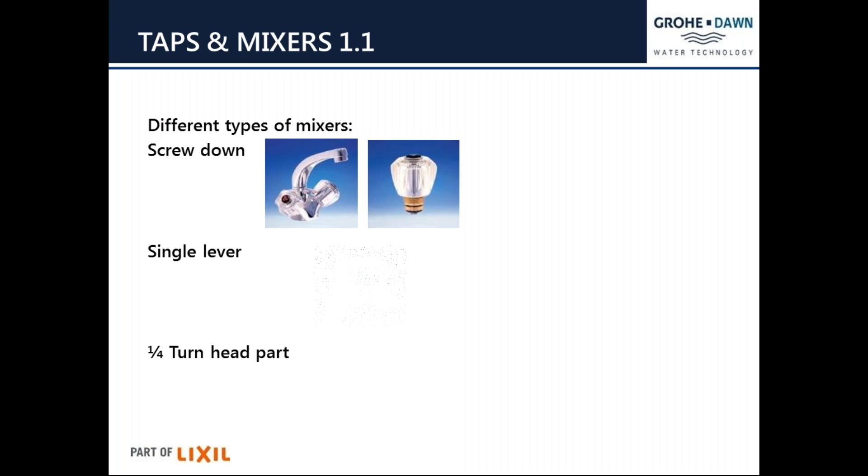Okay, I'm going to continue with the presentation. Just want to get a little bit of a highlighter here. There we go. Okay, Taps & Mixers 1.1 can basically be classified in three specific classifications in terms of how they function.

This is basically across the brands Grohe, Visca and Cobra. You get the screw down versions, the very top images you see there, characterized by head parts and a handle, or head parts and handles. Then the next one, single lever mixers, characterized by a single lever being the actuator operating modus. On the inside of the body you have a cartridge, a ceramic disc cartridge. And then you have your quarter turn head part or quarter turn variety, which is predominantly used in your medical mixers or elbow action mixers.

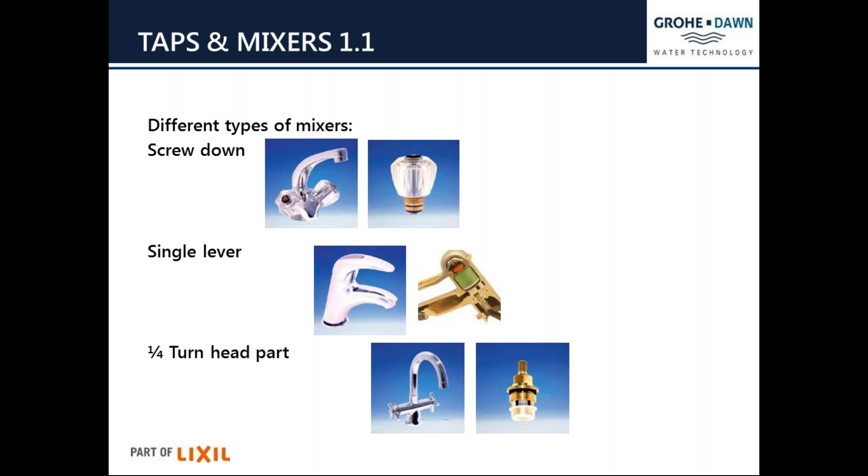Now for decent explanations in terms of what exactly is a screw down. A screw down mixer or screw down tap is characterized by a single operating control or a dual operating control, handles in terms of the screw down mixers. The user has to physically turn these handles in a similar fashion as you would screw in or screw out a screw in a piece of wood, in order to fully open or fully close the actual tap or mixer.

The sealing surface of the head part is made up of a tap jumper and the tap washer. I'm just going to encircle it for you guys so you can see, it's on the very right hand image. Okay done - on the piece I've encircled, that is your jumper with the encapsulated tap washer, and at the bottom you'll see a small piece sticking out. That's just a retaining nut to prevent the washer from falling out.

The distinction between a normal hardware half-inch or three-quarter inch tap washer and the Cobra variety is that the Cobra variety is made of a compound of rubber that does not form a nutrient source for bacteria.

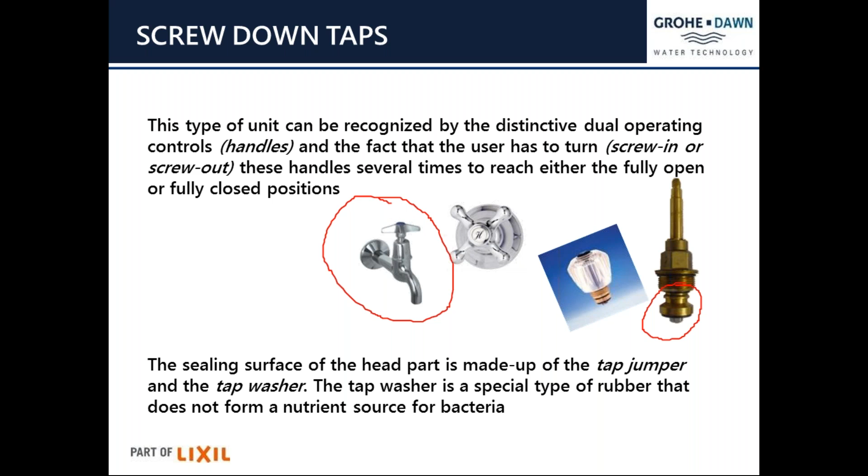If you have a look at the products on the slide, the very one on the left is a bib tap. Your pillar tap will also be a variety of a screw down, and as we said, can either be a single operating function or a dual operating function in terms of a mixer.

The different types of screw down head parts that we get can be easily identified by means of small change - a 1 rand, a 2 rand, and a 5 rand coin. The moment you remove your actual head part by first taking out the indice, then your grub screw, and then the actual handle itself and the little trim kit or dome cover, you will see there's a head part similar to the previous slide, the one on the right hand side that we've encircled. Once the head part has been removed with a suitable type of tool, be that an adjustable wrench or a box spanner, you will see there's an opening in the actual body of the product itself.

So what you do is you take a 1 rand coin and you try to fit it physically inside that opening.

As you can see, if the 1 rand coin fits into that actual opening of the body of the product, you will notice that this is a 15mm light pattern product. That will help you, when we discuss the very next slide, to identify the type of head part that can be used for that product. And remember, this image is of a pillar tap.

The same applies if you have a bib tap, using the 1, 2, and 5 rand coin varieties. By doing that, you go through a process of elimination to get to the correct type of head part that you can buy.

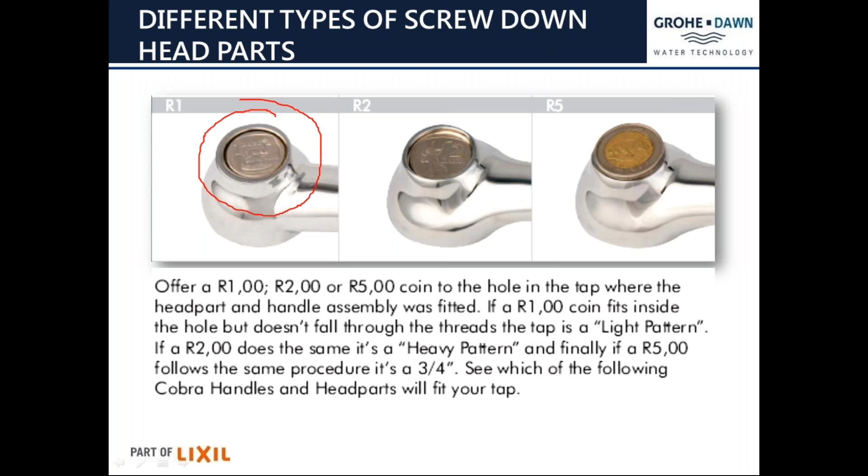If we think in terms of why don't we get a 3/4 inch BSPT, that's British Standard Pipe Thread, light pattern head part as well? Well, the 3/4 inch BSPT light pattern head part is in essence the 1/2 inch BSPT heavy pattern head part. So yes, we therefore do not need that 3/4 inch one.

Just waiting for the very next slide. Okay, done. The very next slide indicates the actual head parts.

So these head parts indicated there, that's your 1 rand variety. Also, if you think in terms of the type of products you get, your pillar taps and your bib taps will use your 61 head parts.

As we go through the type of head parts, you'll notice that the 1 and the 3, the second numerical, is basically always the same. It's just the first numerical that changes with regards to the type of head part there is. But the 1, in this case the 61, will be indicative of all your short type of activating functions, similar to your bib taps and pillar taps.

The 63, the 3, is indicative of your under-wall, behind-tile, or in-wall application, where you would physically build the body of the product into the wall and fix it with mortar, then plaster, then tile. So you need a longer section called the spindle. That spindle section needs to stick out further from the wall so that you can affix your trim set or dome cover, as well as your handle, indices, grub screws, and so forth.

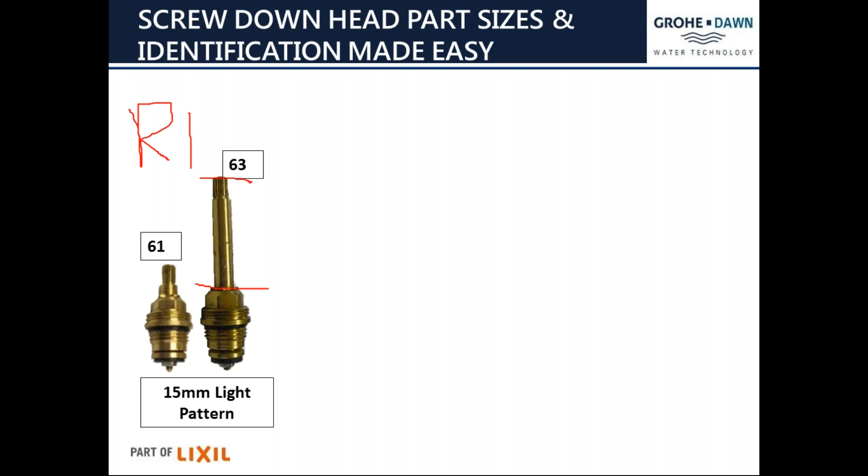Just waiting for the slide to upload again. Okay, the next batch of head parts is basically your 2 rand variety.

As you can see, the 81 and 83 head part, the 1 and the 3 is exactly the same as the previous batch. However, the 80 or the 8s is indicative of 15mm heavy pattern or 20mm light pattern.

In terms of the 15 and the 20mm on the 2 rand variety, as well as your 1 rand variety, it indicates the actual connection size of the product.

So if you think in terms of a pillar tap, you will probably fix it or fit it on top of a 2-tap hole basin. Left hand side is hot, right hand side is cold, as you face the basin. Underneath there's a threaded tube section that goes through the basin that you affix with the back nut, and then you screw your flexi hose into that.

So the 15mm on the 1 rand variety as well as on the 2 rand variety is that connection size there.

If you have a look on the very left side of the 2 rand variety, you will notice that there's a head part 21. The one is indicative of the pillar and bib tap variety, the short spindle sections. However, the 2 is an anomaly in terms of your head parts. This head part is your medical mixer or elbow action mixer.

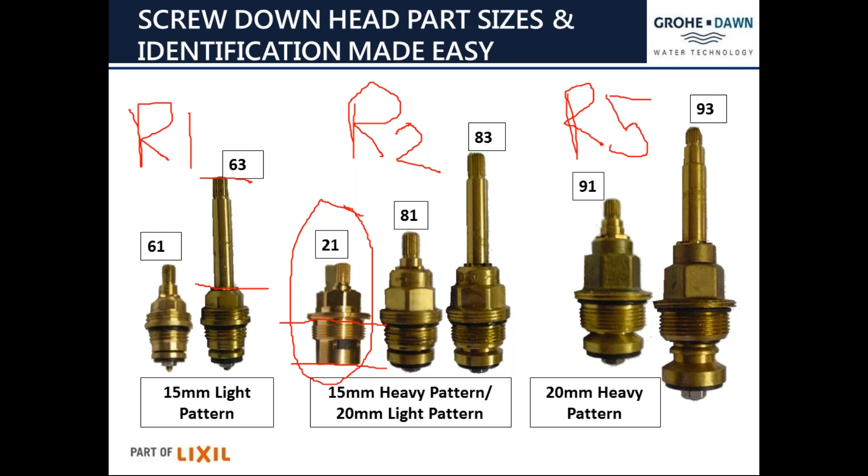Okay, the very next slide basically just elaborates or puts it into perspective what exactly the 3 means on those 1 rand, 2 rand, and 5 rand varieties. As we said, the 3 indicates that these head parts are used for under wall or under tile, in the wall concealed type of applications and installations.

Okay, just waiting for the next slide. Okay, yet again, the 1 rand, 2 rand and 5 rand variety, the 61, 81 and 91s.

That one is indicative that the head parts are used for pillar tap and/or bib tap installations. I just want to go back one slide and explain something with regards to the tip of the new head parts. Historically, we used to have a square drive head part, meaning that top section is physically a square, and that square would fit snugly into your actual handle, and from there you can use the product.

Nowadays, there's been a couple of synergy projects, and we have all standardized to a spline-driven head part. Those splines look like small little gears.

Just hold on one second please, I just have a little bit of a scratch in my throat. Just hang on one second.

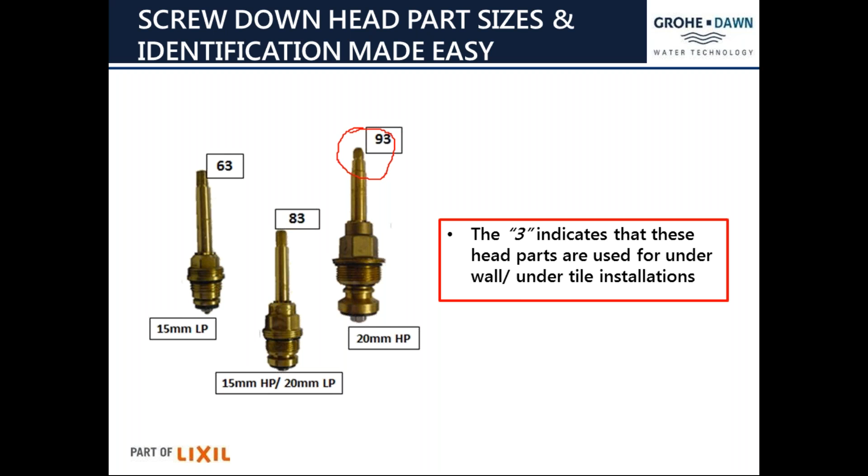Okay, this is the one that we've just covered in terms of the ones for the pillar taps as well as the bib taps. And here we are with your quarter turn head part, the head part 21, or the elbow action or the medical mixers. As you can see by that cutaway of the actual disc used for the quarter turn head part, the white little sections are ceramic discs that basically

slide on top of each other, so that you have full function of the product once you've opened it completely. You will see on the images attached that it is not the Cobra version, the 508 CD. The 508 CD, for instance, works on a progressive cartridge, which is almost self-explanatory. Progressively, it gets warmer.

So the moment you open it, it's cold, and as you move the lever it gets warmer until fully hot. Okay, so these are, as you can see, just basically the average type of medical mixers or elbow action mixers. It's very similar to a screw down unit, but the handle only moves in a 90-degree arc.

The quarter turn head parts also do not use rubber seals to regulate water flow, as with a normal head part, where we discussed that you've got that tap washer at the bottom that physically seats on the seating area or bottoming area of the product itself.

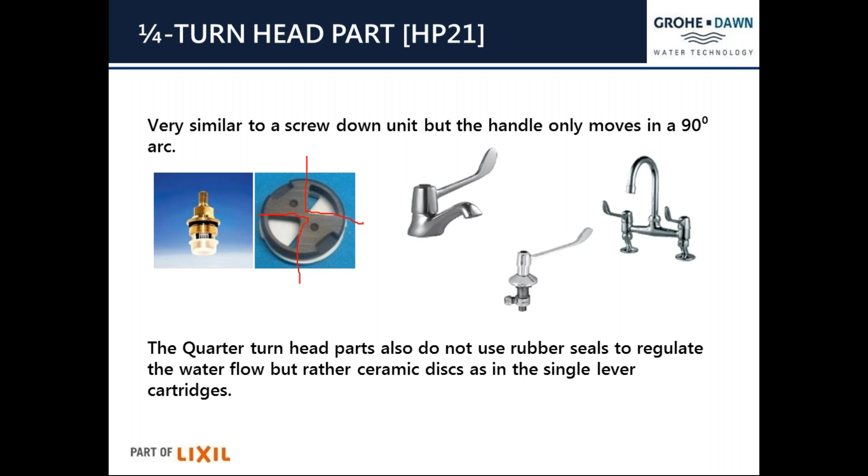Okay, just waiting for the slide to upload. This is exactly what we discussed just now. Any 15mm heavy pattern tap body can accommodate the head part 21 or quarter turn head part, provided the tap body has not been reseated.

Okay, it also saves a heck of a lot of money for people if you are battling or have fallen victim to osteoarthritis and osteoporosis, by literally just having to change the head part and then maybe a medical type handle. As you can see, it's a longer type of handle, which obviously aids in opening and closing of the product.

You also get normal head part type handles, not similar to the Aquila ranges or the Stella Brights, or a round type handle that makes it difficult for people to actually activate it. It's more like a plus sign or a cross handle, so that even if you have arthritis, activating or actuating the product is a heck of a lot easier.

Okay, the same applies with all the other head parts. If you think, especially now Cobra specific, in terms of existing products in your house - if you have, for instance, the Cobra Carina, that one with a triangular type handle, and you're not in the mood for triangles anymore, and you'd want something with an acrylic look and feel, then it would be the Stella Bright.

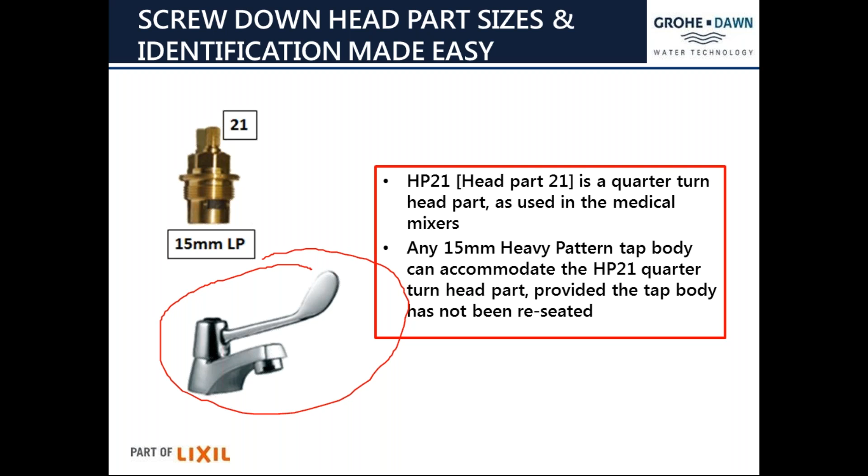If you think in terms of your garden variety garden bib taps, they basically all feature a rough brass finish. That means the product has not been polished to a full shine, not chrome plated or nickel plated or done anything with. As it comes out of the factory, it's a DZR brass body as well as a DZR brass head part with all the normal functioning and operations of a normal head part. The image on the left-hand side is your 15mm garden bib tap variety.

In the old days, the head part used to come out with a gland packing, as I've encircled on the image on the right-hand side. That gland packing basically ensured that water does not come through the internal workings of that head part and seep out at the handle.

In the old days, if you still have the 15mm smaller variety of garden bib taps in your garden, there's a bit of it, not really a leak, there's water pushing through at that handle section, especially if you've got back pressure.

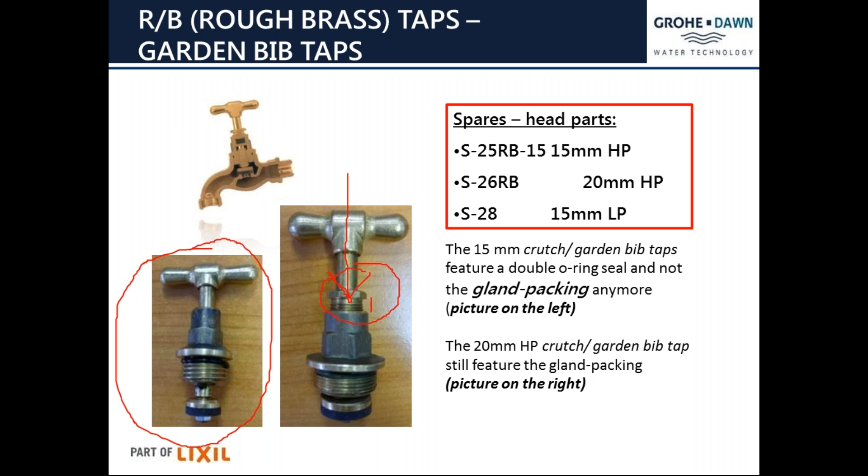Your single lever mixers throughout the ranges. This type of activation or actuator is only used in mixers, and the name explains its main characteristic, namely the use of a single lever to obtain the ratio of blended water, hot and cold, as well as the water flow control. The internal workings are contained in a sealed, unserviceable cartridge with ceramic discs.

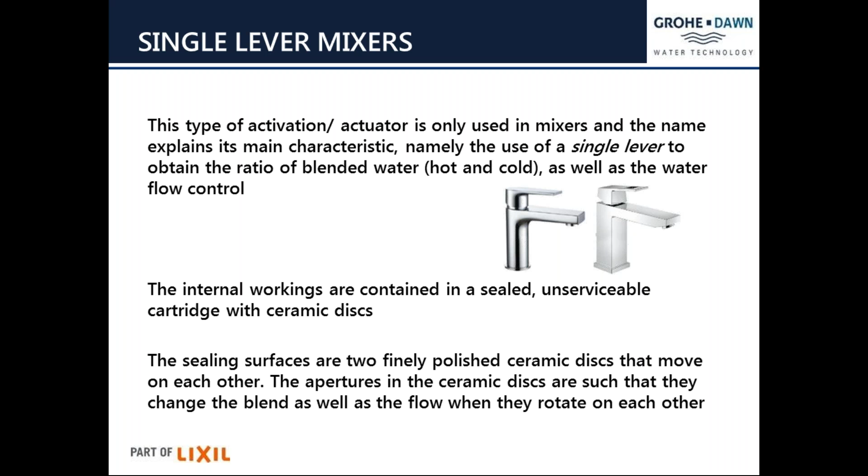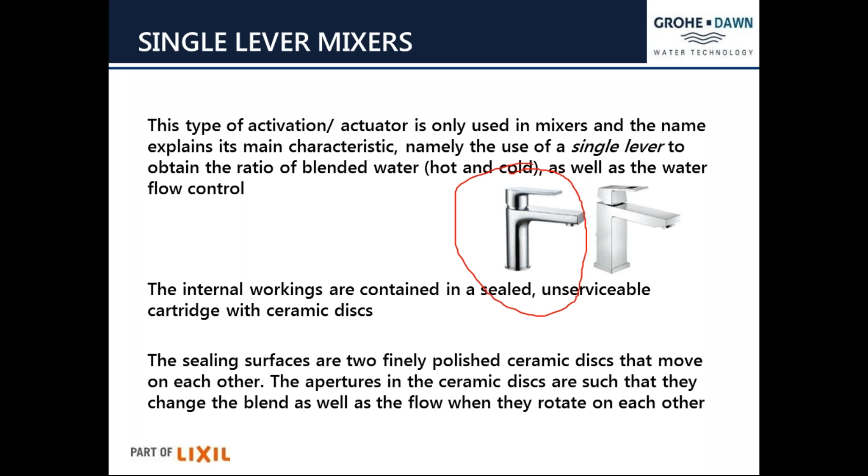The apertures on the ceramic discs are such that they change the blend as well as the flow when they rotate on each other. So basically, on your single lever mixer, it only has a single lever. You will never get a dual controlled single lever mixer, because then it's not a single lever mixer anymore. On the inside of the body of the mixer itself, whether it's a concealed, basin, shower mixer or diverter mixer and so forth, you will find a cartridge.

Those cartridges come in a variety of sizes and appearances. The top cartridge is a raised base cartridge, characterized by the bottom pieces as indicated. At the bottom of that raised section, you'll see there are two plastic protrusions. Those are called locating pins. Those locating pins fit into locating holes in the body of a single lever mixer.

This will help you to ensure that you put the mixer of the cartridge inside the body in the proper alignment so that you have a proper functioning single lever mixer. The size, 35mm, 40mm, whatever size it is, you physically measure from the outside to the other outside, and whatever size that measures, that is basically the actual size of the cartridge.

So now Cobra has a 35mm flat base, a 35mm raised base, and a 46mm as well. This 46mm is exactly the same cartridge as is used by Grohe, and it's the cartridge that was used in the old Cobra Focus ranges, that 46mm.

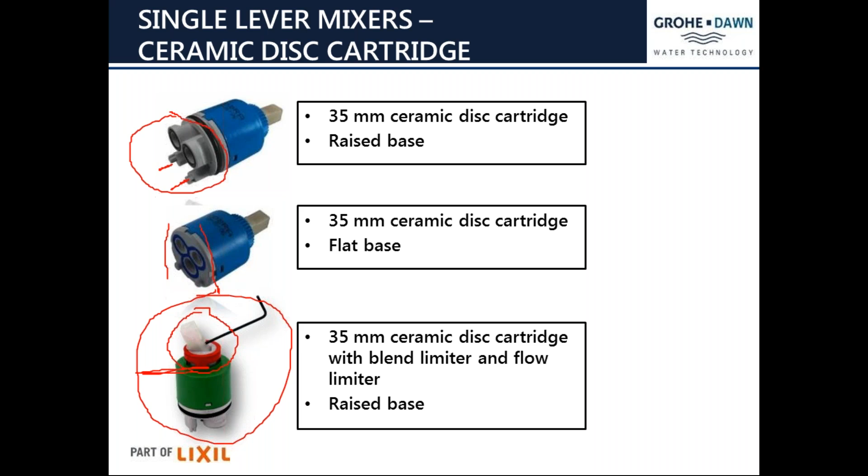Okay, all good. And then basically from our side, this is the whole story about taps and mixers 101.